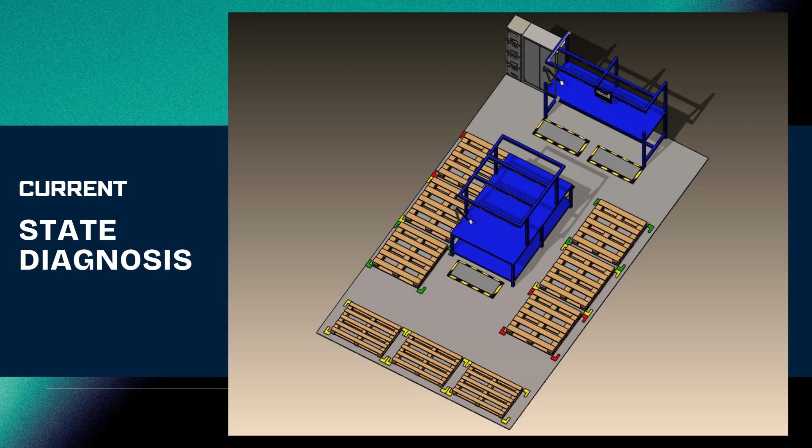Getting into what matters, the not so compelling layout you have there did not present optimal conditions to the operators of the area, especially regarding criteria such as hall length, table area, and height. These criteria are also known as ergonomic principles, concluding physical space is not enough. Workflow is not visually clear, nor are entrances or exits clearly established. For the illumination, the use of old technologies is evident. Indeed, a change is needed.

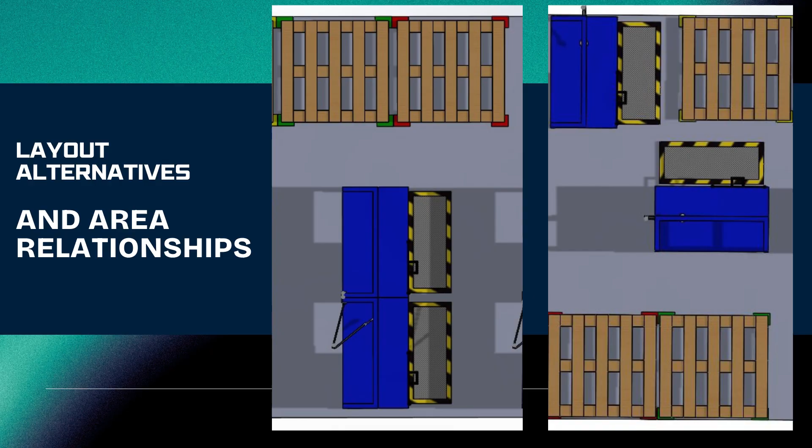Alternatives. The following are potential distributions and changes that cover the deficiencies seen in the actual layout. Features of the layouts are classified in 4 categories, which are machinery, personnel, furniture, and others. This matrix is a tool that helps us group qualitative and quantitative differences between layouts.

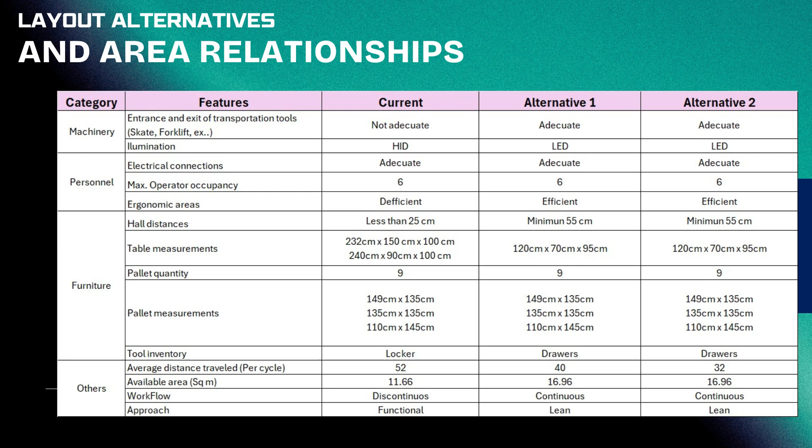Some of these features are kept the same through the layouts because you asked for it, according to your needs. Examples of these are the pallet quantity, measurements, and maximum operator occupancy. Our challenge here was to keep those features that have been working for you while changing those that don't.

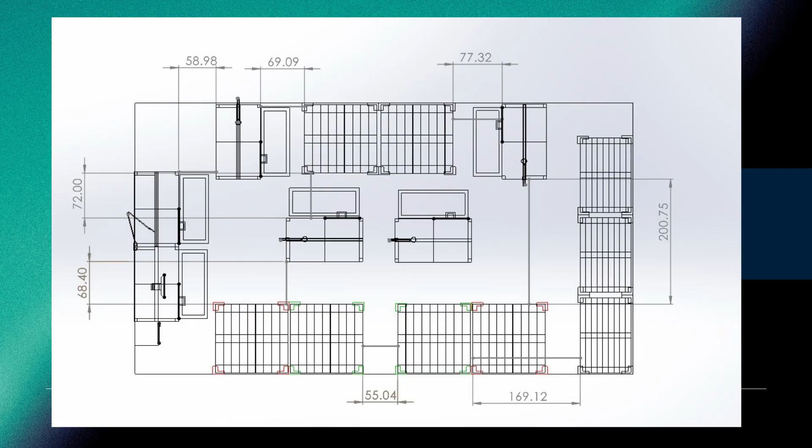Backed up by ergonomic distances, we increased the walking areas or halls to a minimum of 55 centimeters. Keep in mind, it's an important concept. Rather than just being a commodity excuse, it had the biggest impact. Avoid the squeezing between tiny spaces and getting out of the bounds. Getting closer to a continuous workflow and lean philosophy.

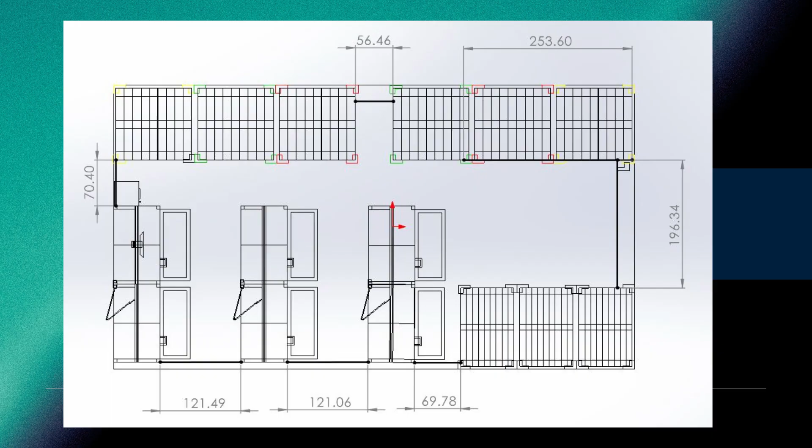It's important to note that we use the same measurements of the new table in both potential layouts and use of LEDs. Regarding the table, drawers were added in order to make up more space, eliminating the locker, also reducing the distance if a tool is needed. Indicators of performance. Not just distance, but clearness is evident. Even though the elements are almost the same, we found more operative space while keeping the process efficient.

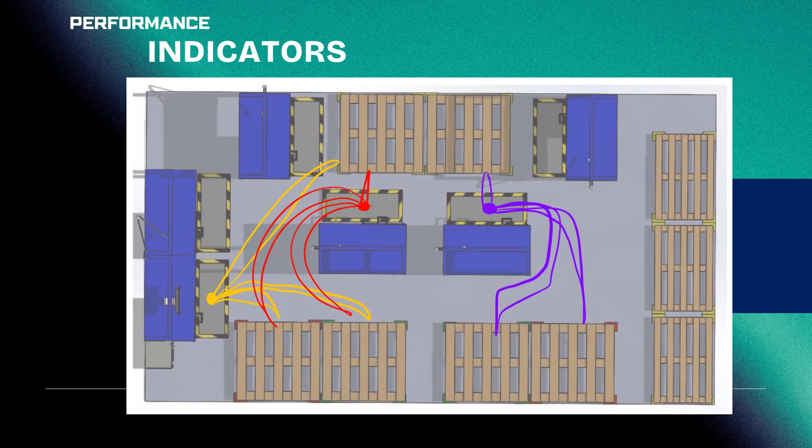Using this tool, called spaghetti diagram, we first wanted to show the difference in distribution. Thanks to the new distribution, it resulted in less potential movements being made by operators. The new furniture also represented less space occupied by it. Adding the surface area of all the supplies, table, lockers, and pallets, and then subtracting it from the total area available, gets us free operative space.

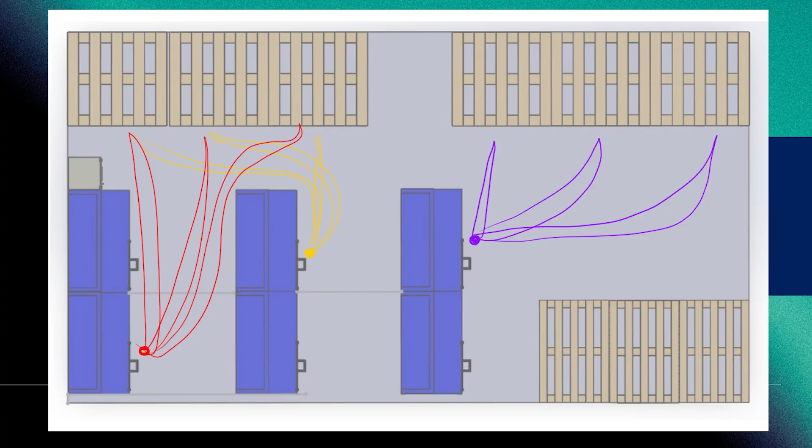Regarding time, supposing an 8-hour shift, the distance traveled saved by moving less is 374 and 638 meters for potential layout 1 and 2 respectively, leading to 6 to 10 minutes of spare time. This extra time acts as a safety net for unforeseen changes in the process, loosening the takt time specified.

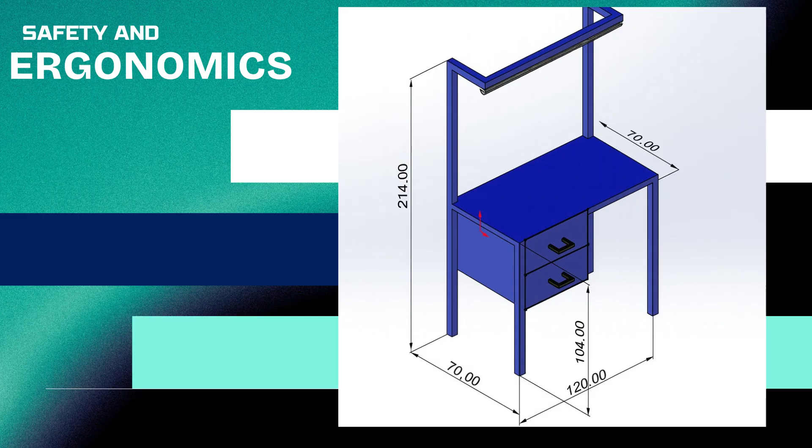Safety and ergonomics. To achieve free or non-obstructed movement of a person, a 55 to 60 centimeter hall is ideal. Due to the visually detailed inspection, 90 to 110 centimeters height is needed, 60 to 80 centimeters for width, and 80 to 120 centimeters for length. All these measurements represent a baseline for everyone, regardless of their complexion, height, or any other characteristic related to the body.

Illumination and energy efficiency. While HID lights help achieve high-intensity illumination, LEDs outperform HID in efficiency, lifespan, and installation ease. LEDs often convert 50% of the energy source into light, while HID average 20 to 30% of the energy being converted into light. The rest is released as heat.

HID use makes sense at first, looking at its best advantage, the light intensity and distance. But changing it to LEDs will produce a decrease in operational and maintenance costs. In the long run, LEDs prove to be a more sustainable and cost-effective option for continuous use, offering design flexibility and certainty with frequent switching.

The required lux level based on NOM 25 should be maintained between 500 and 1000 lux to ensure proper visibility and comfort. Regarding LED light, some models available on the market deliver around 665 lux, making them suitable for realizing the process.

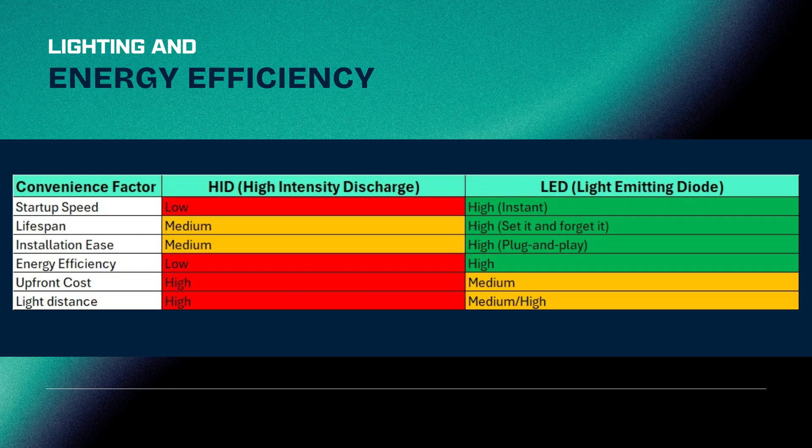Implementation plan and continuity. The implementation of these layouts needs four essential phases. Preparation: the delimitation of the new assigned areas, which will take us 2 days; installation of first in, first out racks, which will also take us 2 days, including one of the previous steps; 1 day adding visual identification, and 2 days to relocate the furniture.

The second phase is controlled migration. In this phase, we will take a week. The first 4 days we will be doing simulation tests. On day 4, we will begin the risk review until the end of the week. Execution. The operations will start on Monday of week 3. Then, we will monitor the performance 3 days in a row to make immediate adjustments.

Stabilization and standardization includes training, key performance indicator monitoring, and tools such as 5S, implementing them in audits to maintain them. This 5S audit needs to be done at least 1 day per month. Training will be taking 4 days.

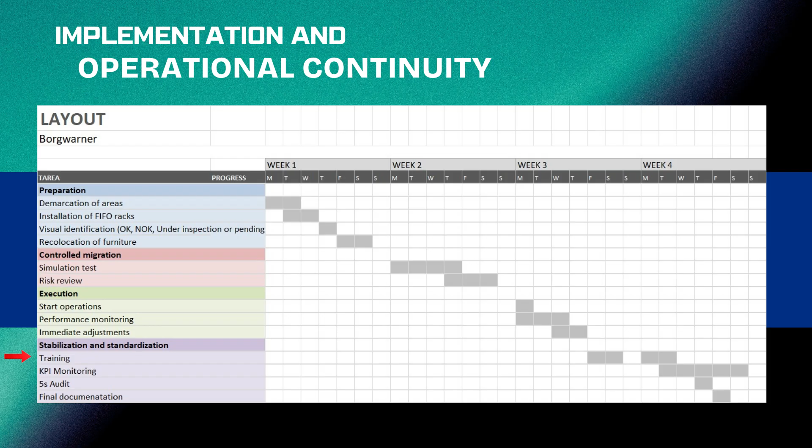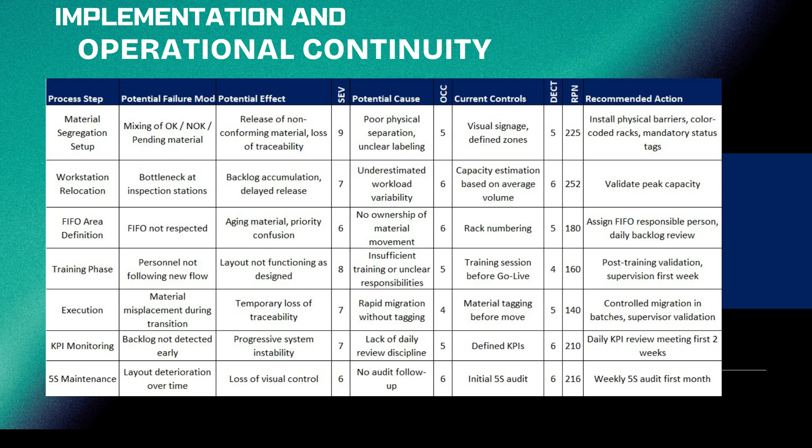We use a process failure mode and effect analysis to evaluate the possible risks while implementing the layouts. As a result of this, the top 3 failures with the highest score were the workstation relocation with a risk priority number of 252. The recommended action for this potential problem is to validate the peak capacity.

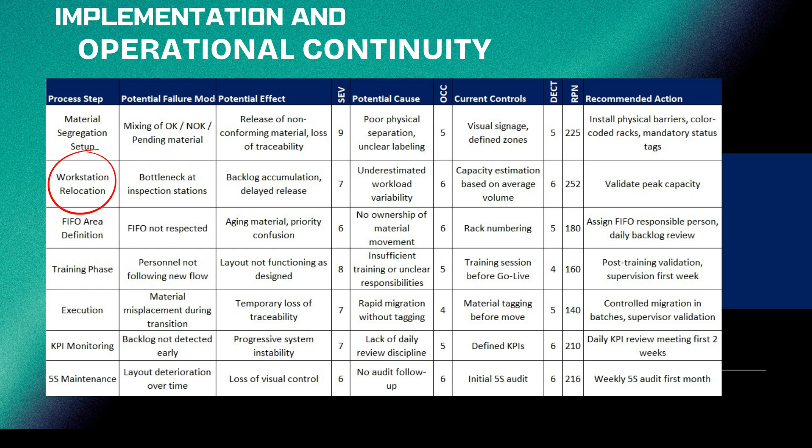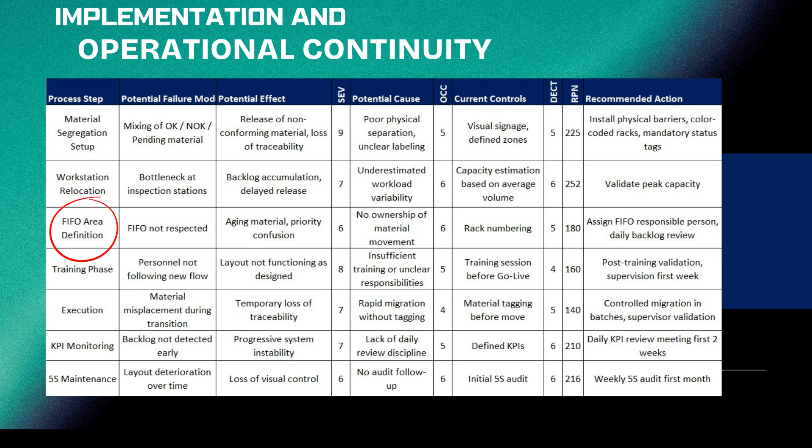Then, the material segregation setup with a score of 225, solving it by installing physical barriers, color-coded racks, and mandatory status tags. To end this step, the 5S maintenance with a score of 216, having a recommended action of auditing it at least once a month.

For this project, artificial intelligence was used as a supporting tool to accurately identify the company's corporate colors, including the Pantone equivalents, and institutional typography. This helped ensure visual consistency and fidelity to the brand identity.

Having a well-designed layout within a company is essential as it allows space to be organized strategically to optimize processes, improve visual communication, and facilitate interaction between clients and collaborators. An efficient spatial distribution not only increases productivity, but also projects a professional image aligned with the brand's identity. Therefore, layout design becomes a key element for enhancing functionality, organization, and overall business performance.